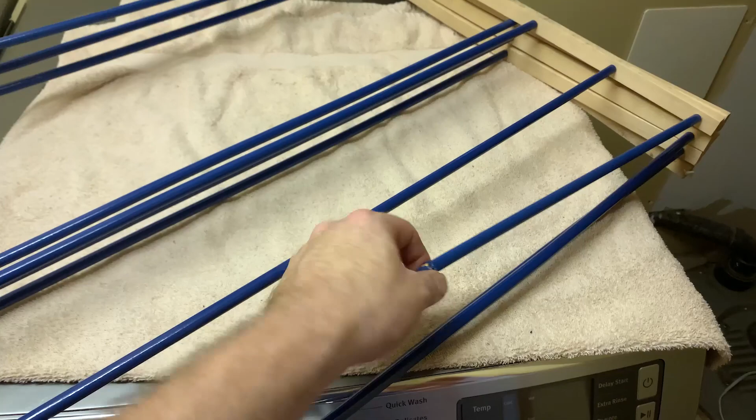This is the patient for today, a household drying rack. I've tried gluing this already and it wouldn't hold, it kept breaking. With the pandemic going on, I don't really want to go out or pay for a new one. The plan is to design a simple cylinder in CAD, then print it out on my i3 Mega and slide it over the broken rod and glue it into place.

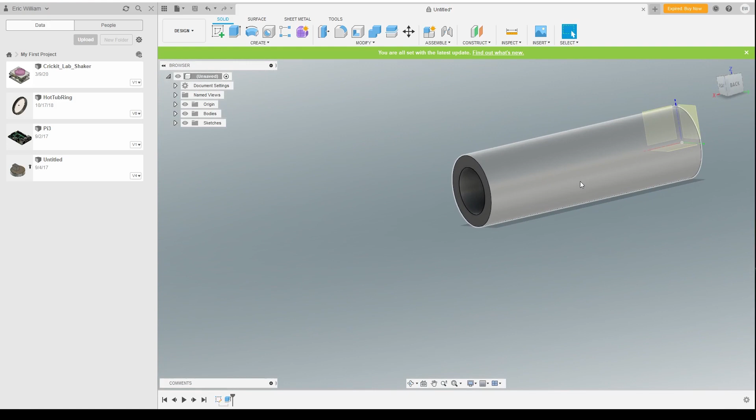Here I'm using Fusion 360 to create the model. I've since flipped over to FreeCAD because it's open source and not proprietary. Lots of examples online that you can find, mostly YouTube tutorials, really handy but long. Long and short of it is we make our cylinder in a circle shape and then just extrude it in 3D.

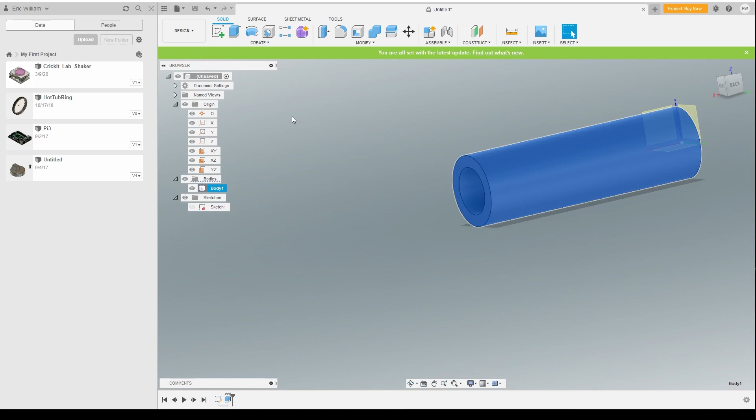Then we export that to an STL file that we can work with on the 3D printer. The model looks pretty good for what we need. We'll export that out and bring it into Cura, which is going to slice it into all the G-code that the printer needs to make it.

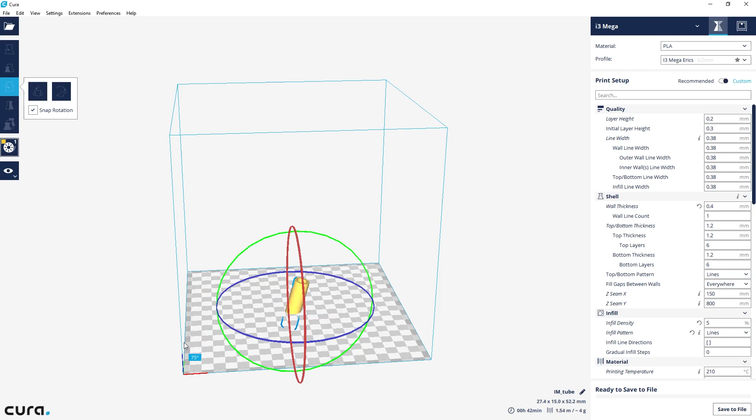I exported it horizontally by accident here. No problem, just rotate it to the vertical. That way the printer can do it really easy. We hit export, go ahead and move the files over to our printer of choice. Today we're using the i3 Mega. Away we go.

Now there's pretty much nothing to it at this stage. I need to break things apart, and then I slide the cylinder over and make sure we have a good fit, and remove any of the glue from my previous attempts at repairing this. Once I'm happy with the fit and things look like they're going to hold together, then I go ahead and glue it up.

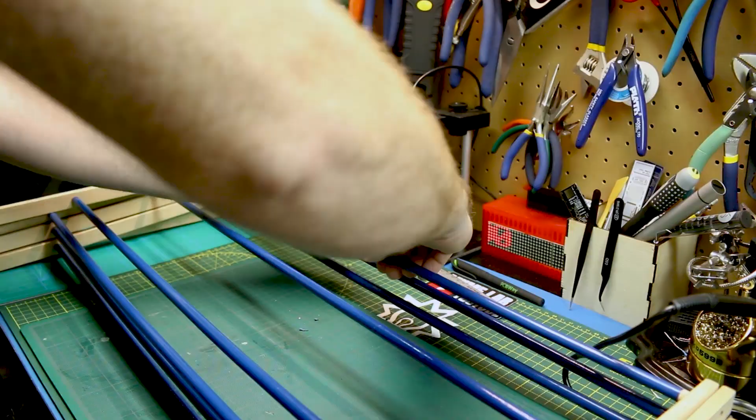Now this may seem like a really simple repair, because it really is, but this is the difference between me having to go out and deal with lockdown lineups and closed stores, or just repairing it in my house. This is a solid, good repair. I'm really happy with it.

And back in place, everything is working perfectly. It's nice and solid, more solid than it ever was from new. No problems. I didn't have to go out in the pandemic. I was able to keep this in service and save myself a bit of money. Wonderful use for 3D printing. Good luck in all your projects.